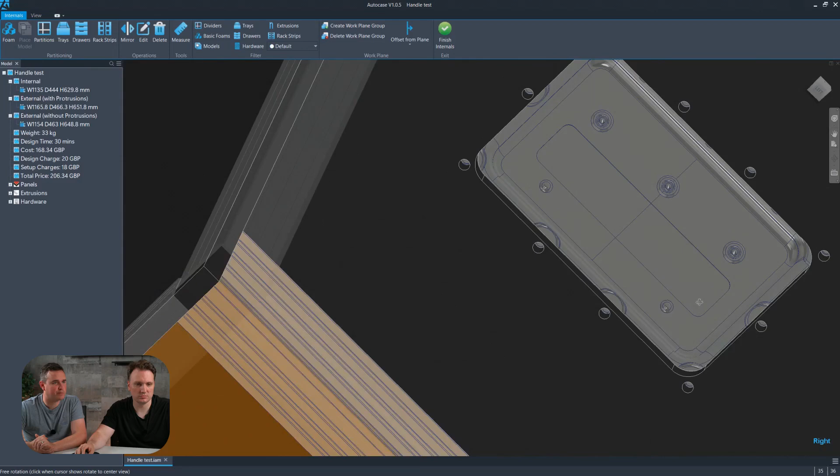Okay, let's just have a look at how we can edit the cutout sketch of a handle. So if you just show us very quickly what the inside of this looks like, if I go into internal design. So currently we have a relatively standard set of holes. So you can probably see that the width of the cutout is probably wider than it needs to be. So we can adjust that in the handle settings.

So what we'll do is we will come out of this case up into library. We're going to go into the library, clicking on the library button. Now edit hardware. Now if we go to the library and find the library, there's our handle. Click on the little tick and then edit. That will take us into this environment.

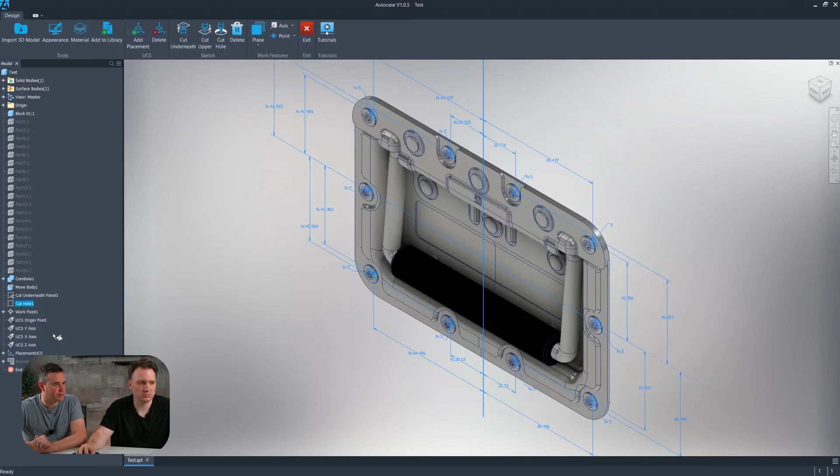So we now need to get into the sketch view. So we need to edit both the holes and the panel cut. So yeah, right click, edit sketch. So these are the holes, these are all dimensioned. So what we're going to do is just move a few of them around just so you can see this working in real time.

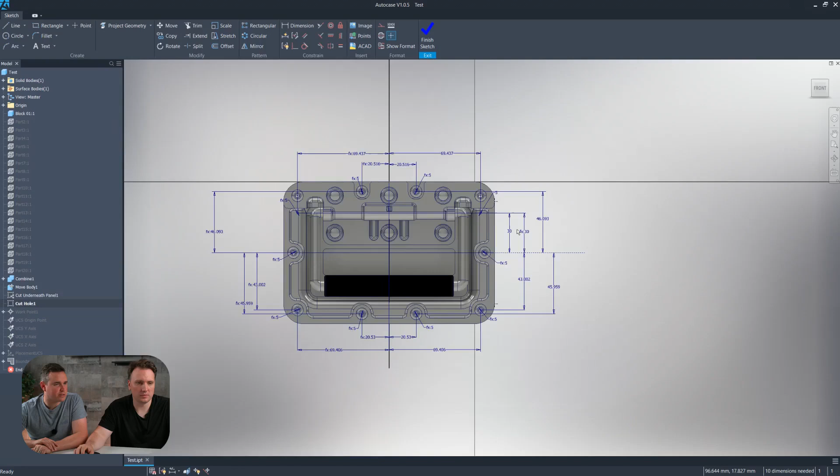So if we select, let's say the one that is the top right hole, 42, that's it, yeah. Let's make this something like 30 millimeters. Obviously this is incorrect, but it just gives you an idea of what you can do. So that's now moved. And you'll notice that both holes that are linked, so because we've linked two holes, you can now see that the left and the right hole have moved down to that 30 millimeter measurement.

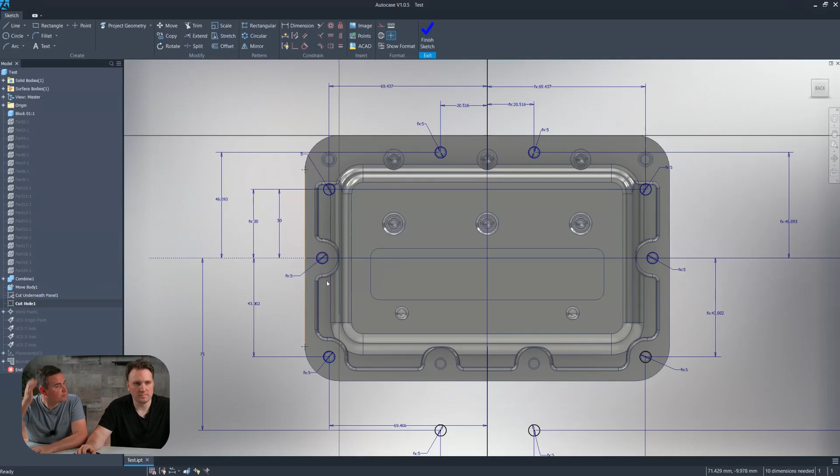Yep. And let's just for fun move some of the bottom holes just totally off of the handle. So yep, change that measurement to maybe 75 or something. So they're now floating down there. It doesn't really matter where you place them, but just as an example of what will happen. So let's finish the sketch, which will save that essentially.

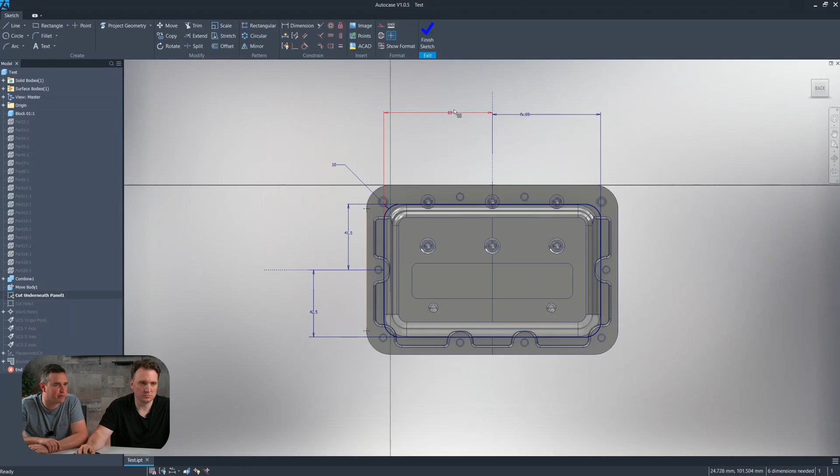And now the cutout of the panel is a bit wide. So I'm going to go into the underneath panel cut, rotate it around so we can see that a bit clearer. So yeah, you can see that line is just a bit wider than it needs to be. So we're going to go up to the top where we've got our 69 measurement. And maybe if we make that, let's try 66. Let's see how that looks.

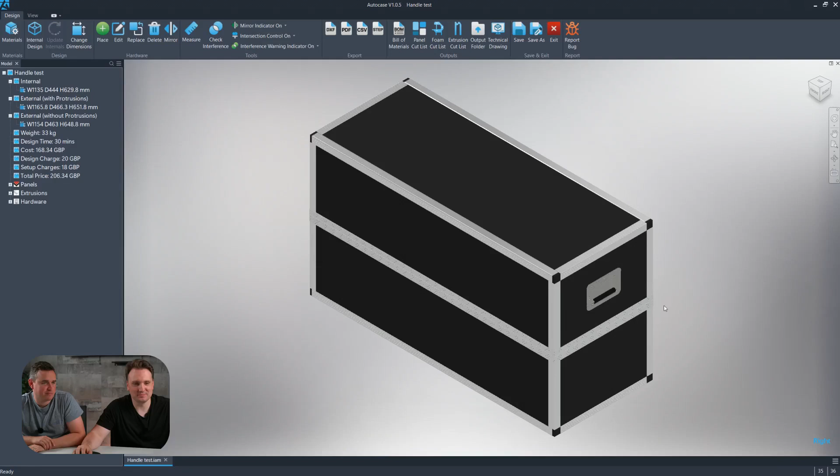Both sides are updated. And yeah, that looks better. So we'll go with that for now. So let's finish the sketch. And now we just need to update those changes and save those changes. So let's open up the case we had a moment ago. Okay, so we're now back in the case design we were in a moment ago.

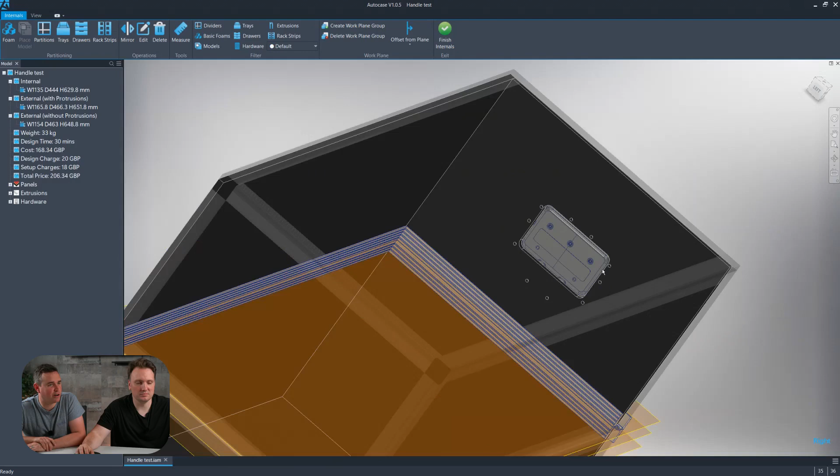So if we now have a look on the inside views, much easier to see. So we go to internal design, and you can see now those changes, albeit slightly wacky changes, have updated. The top left and right holes have come down, and the center left and right holes have dropped way down. And you can also see that the width of the actual wood cutout is much tighter as per the adjustment.